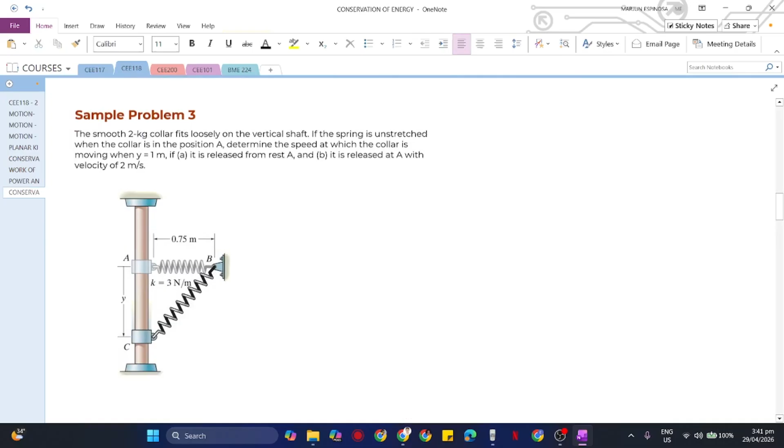Proceed lang tayo sa problem number 3. Tsaka later, we'll also be solving problem number 4 and problem number 5.

Okay, problem number 3. We have here the smooth 2 kilogram collar fits loosely on a vertical shaft. If the spring is unstretched when the collar is in the position of A, determine the speed at which the collar is moving when y is equivalent to 1 meter, if it is released from rest at A, and B if it is released at A with velocity of 2 meters per second.

Dalawang scenario to, class. Una, if i-drop lang yung collar A, so initially from rest, at yung isa may initial velocity siya na 2 meters per second. So kukunin natin yung velocity niya at point C. So basically that is VC.

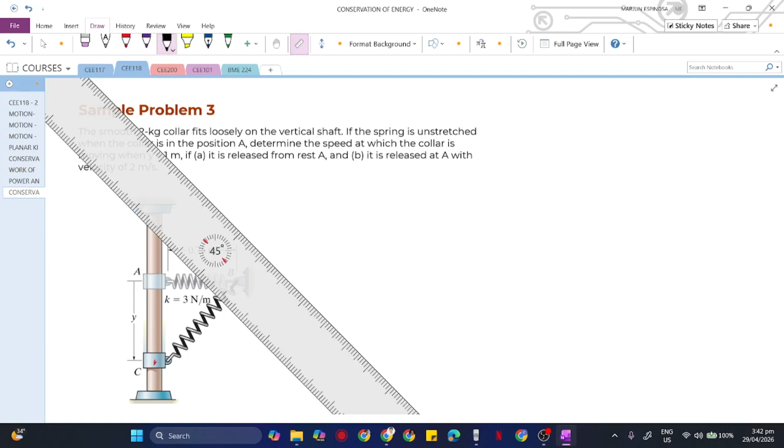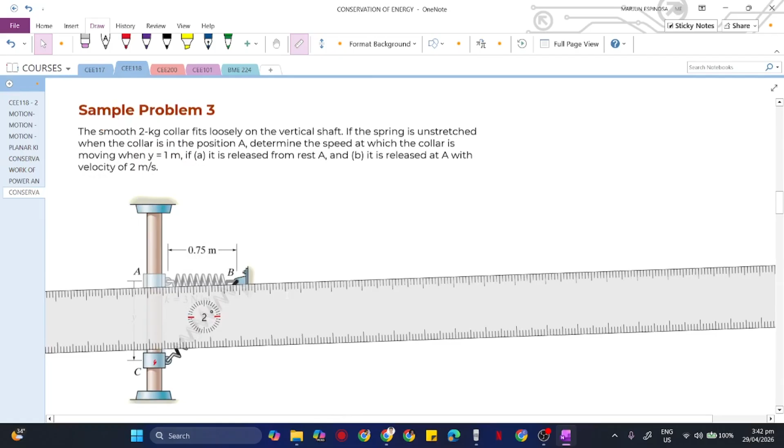Same thing kahapon, we will be assuming a datum line. Gagawa tayo ng reference line, or datum line. Gawa tayo ng datum line here. That is our datum line, so this is our datum line or reference point or reference line. Now at this point or at this line, yung velocity niya, initial kinetic energy at saka potential energy will be equal to 0.

Now, the moment na yung collar natin ay mag-move from point A papuntang point C, that is downwards, therefore magdi-decrease yung potential energy niya. Tama ba? Okay, so using law of conservation of energy.

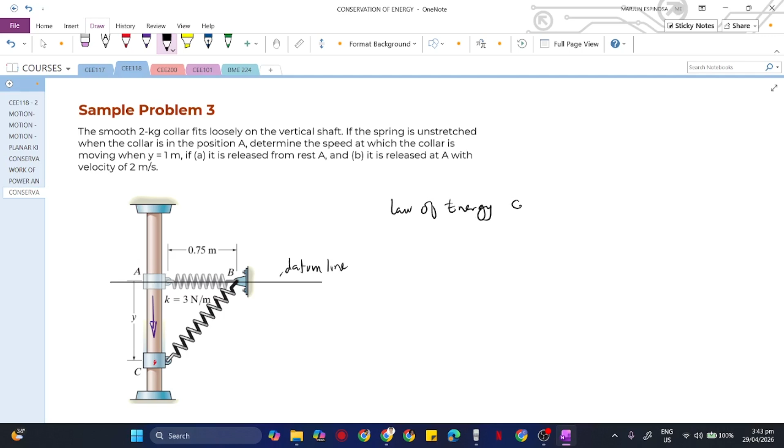Law of energy conservation, we have here kinetic energy 1 plus potential energy at state 1 will be equivalent sa kinetic energy at point 2 plus yung potential energy at point 2. Now, yung kinetic energy at point 1, considering yung first natin na scenario dito that it is being released from rest.

So yung kinetic energy at point 1 will be equal to 0. Yung potential energy at point 1 will also be equal to 0. At yung pinahanap natin dito is yung velocity at point 2, that is the velocity ng collar at point C. So VC, lagay natin yan V sub C square.

Plus, again, yung potential energy dito will be the summation of all the potential energy involved. Since yung weight natin ay nagbaba, so that is a negative potential energy. Due to that decrease in potential energy, nag-increase naman yung potential spring energy o spring potential energy nitong spring. So therefore, we have here 1/2 K S square, considering yung S natin is the stretched length ng spring, tapos minus natin yan sa weight potential energy, which is mgh. Ito na yung magiging equation natin for the solving of velocity at point C.

So but first we need to solve for the value ng S. Itong S, ano yung na-stretch or na-compress na length. Or in other words, ito yung length na na-displace, na-displace na length ng spring, either na-stretch or na-compress. But in our problem, obviously, na-stretch siya.

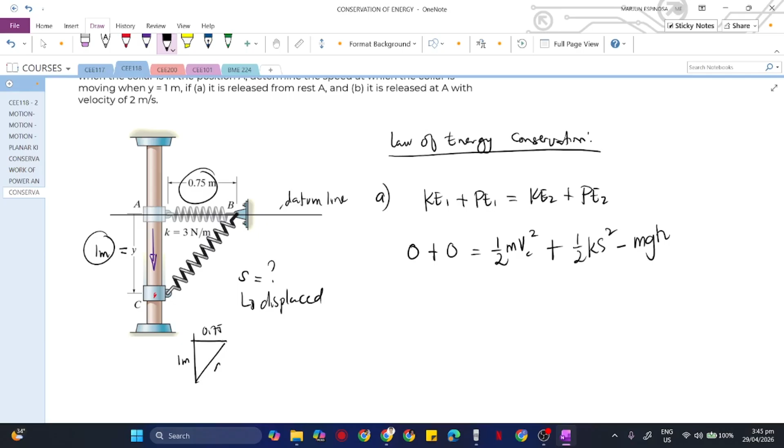Considering na yung y natin is 1 meter, so ito 0.75, ito 1 meter. So we can create a triangle, similar kahapon. So this is 1 meter, this is 0.75. Now we can solve for the value of C, itong hypotenuse na to o length nito, class. So therefore, we have here, C is equivalent sa 1 squared plus 0.75 squared. Obviously, this is equivalent sa... ano to, class? 1.25, diba? 1.25. Yes, correct.

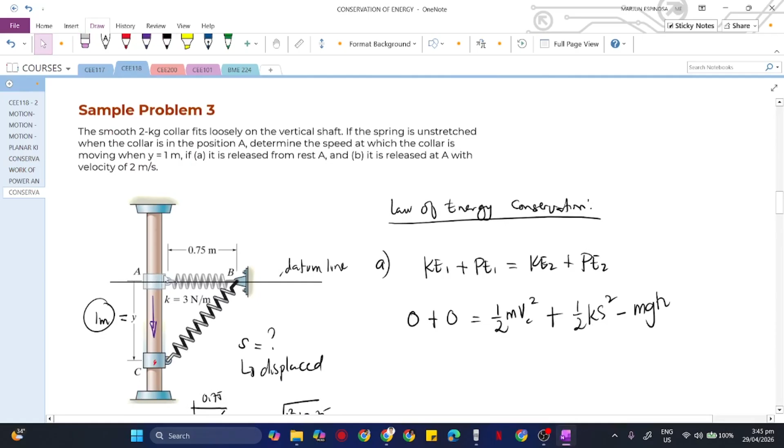At so therefore, yung na-stretch or na-displace na length pala is 1.25, yung final length ng spring. At then, initially, 0.75 yan. Tama ba? Sabi dito kasi, if the spring is unstretched when the collar is in the position of A, so ito yung unstretched na length ng spring. So that is 0.75. So minus 0.75, therefore yung stretch length pala is 0.5 meters. So yan yung gagamitin natin na S for this one here.

Okay, so therefore, ang mangyari nito, 0 equivalent sa 1/2. Yung mass ng collar is 2 kilograms.

Tapos velocity square plus k, 1 half, yung k natin is 3 newtons per meter, tapos yung s natin is yung na-calculate natin, 0.5 square, then minus yung collar natin, tapos 9.81, tapos yung height, yung binaba is 1 meter. Okay, 1 meter. So shift solve, makukuha natin itong velocity at point C, o velocity ng collar at point C. Sige, kunin natin yung calculator.

0 equivalent sa ito, magiging v square na yan, no? So gawin natin is ito, i-algebra natin, punta natin dito lahat yan, transpose natin. Okay, magiging negative na yan, negative 0.5, negative 0.5 or 1 half times 3 times 0.5 square. Then ito magiging positive, positive 2 times 9.81 upon transposing to other side. Okay, that is equivalent to this one, 19.245.

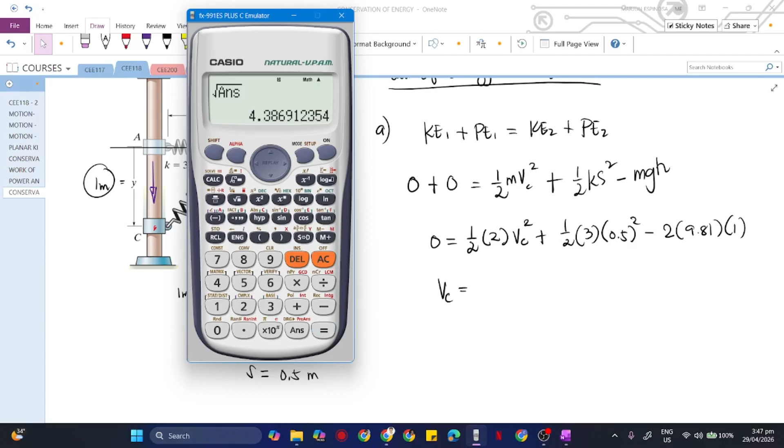That is our VC squared. Then taking the roots of that, okay, taking the square root, we get 4.386, or about 4.39 meters per second. Okay, meters per second.

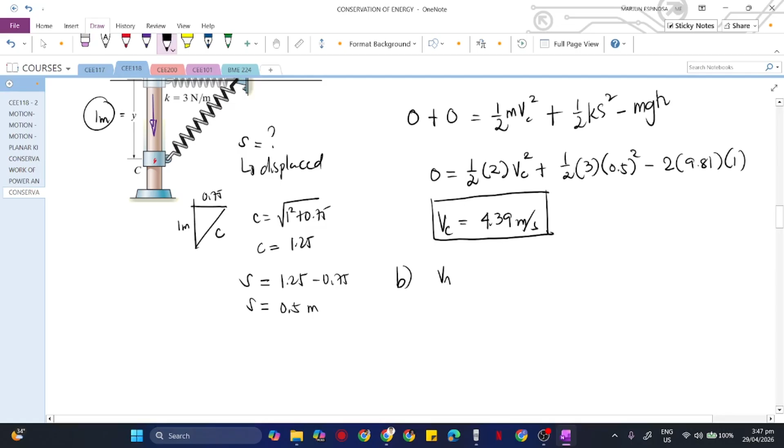Okay, then yung sagot dito, considering na yung collar natin is released from rest. Now, if ever yung collar natin at point A ay mayroong velocity that is equivalent sa 2 meters per second, ang mangyayari lang dito is similar pa rin yung magiging equation natin.

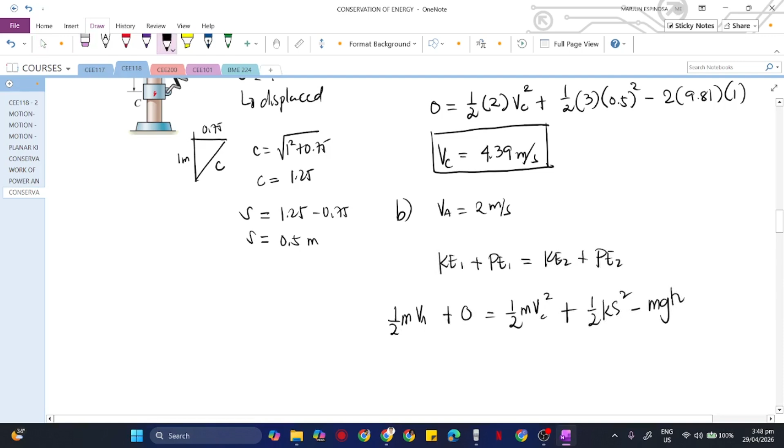Ito, let me just copy this one. Similar pa rin yung magiging equation natin. Pero yung sa kinetic energy, meron na yung 1 half m velocity sa point A square. So basically similar pa rin dito, similar pa rin yan dito. Pero instead of 0 na dito, magiging 1 half, tapos mass, 2 kilograms, tapos velocity, which is ang velocity natin is 2 square.

Okay, so balik lang tayo dun sa ating previous na nasa input natin sa calculator. Ito, lagay natin dito, diba? 1 half of 2, that is 1 lang, tapos 2 square. Lagay natin dito 2 square. And then similar lang yan, then square root nyan, and then we get 4.82.

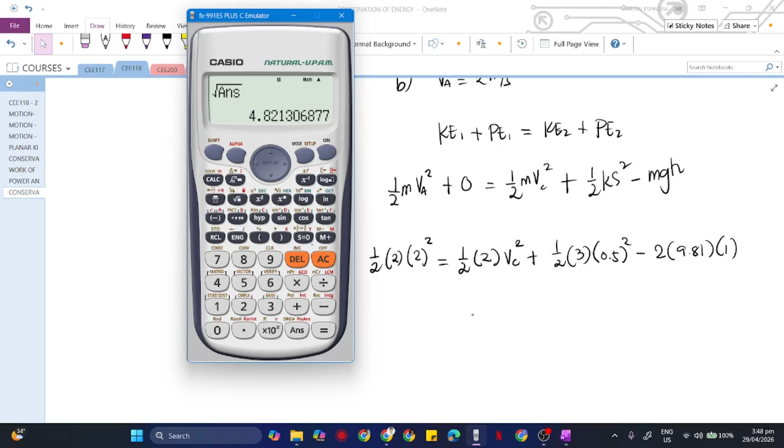Yan na yung magiging sagot natin for dito. So yung velocity at point C ng collar is 4.82 meters per second, and direction yan is papunta dun, papunta dito, papunta sa ilalim. As you can see, mapababa man yan. Ito din, no? So any questions, class?

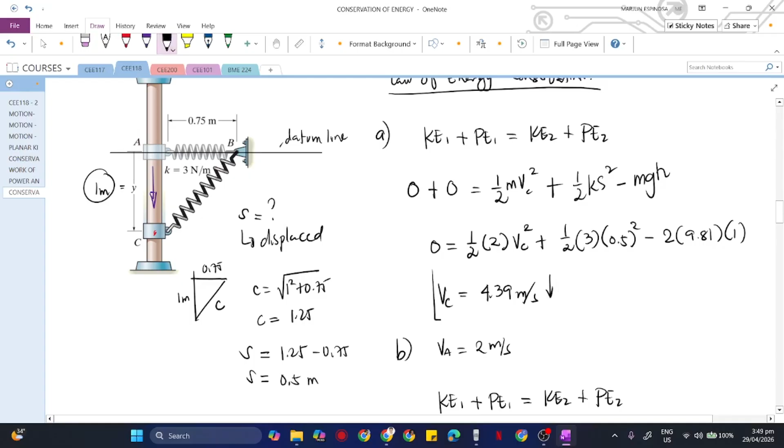Hello, any questions regarding this problem?

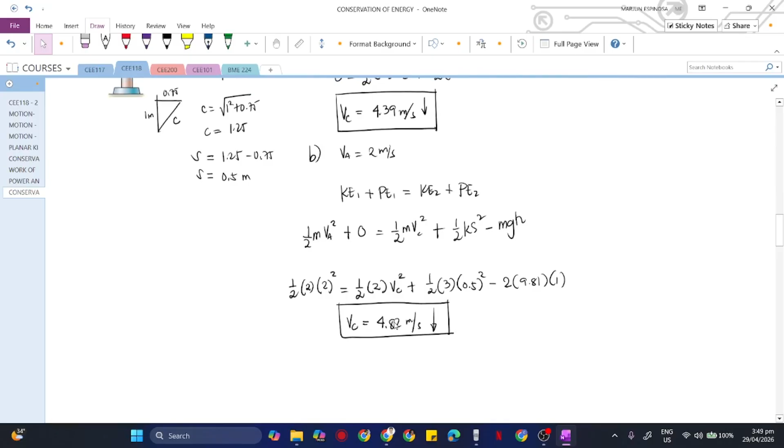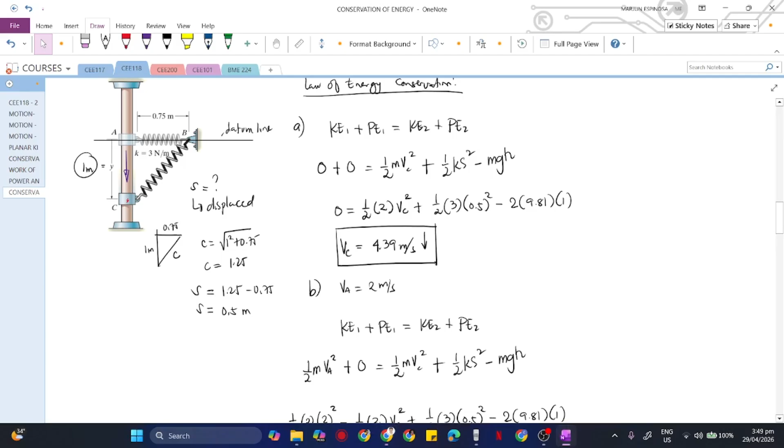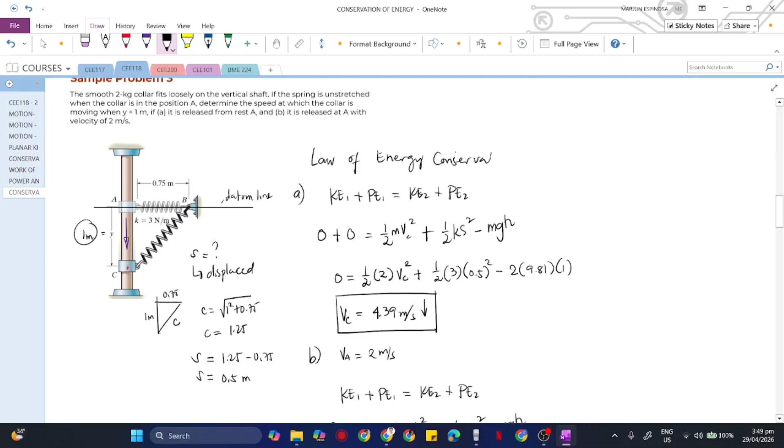P sir, no? Hello? Sorry? Nawala ka, kindly repeat your question please. Hello? Nawala, no? Or ako ang nawala? Hello? Hello sir, oh pakiulit na lang yung tanong. Putol-putol ka sir, putol-putol ako. Sorry.

As I was saying, yung PE1 naging 0 yan kasi we assume dito na itong line na to is yung tawag nito, yung datum line natin. Saan tayo magre-reference line? Dun sa initial position. Nakuha ba?

Hello? Hello? Yes sir, yes sir. Wala nagliyok imong PPT, sir. Okay, sorry, as I was saying, no, di ba dito, dito tayo naglagay ng datum line or yung reference line, tama ba?

So ang ano kasi, rule kasi, hindi necessarily the rule, pero yung naging convention is that we will be putting a reference line kung saan yung initial position ng ating collar or ng ating object. So kaya at this point, sa reference line, we assume na yan yung magiging ground natin, kumbaga, imaginary or arbitrary ground. So at that point, yung potential energy dan is 0. Kuha ba? Kaya nagiging 0 dito.

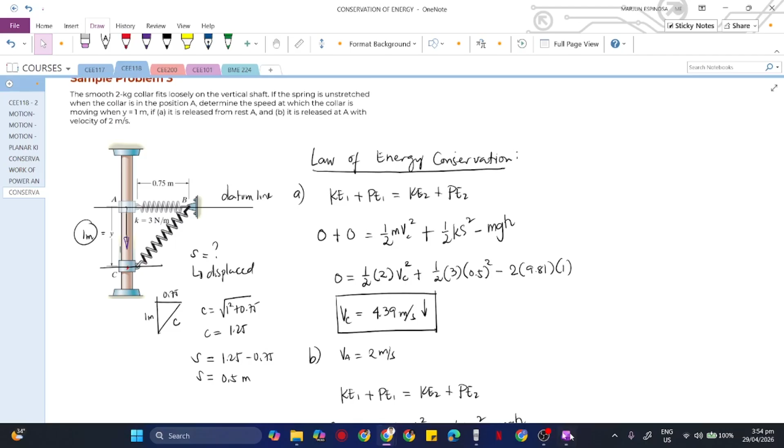Okay, that's good, no? Sige, can we proceed to problem number 4 pala? Okay, proceed tayo sa problem number 4, ha? May question pa?

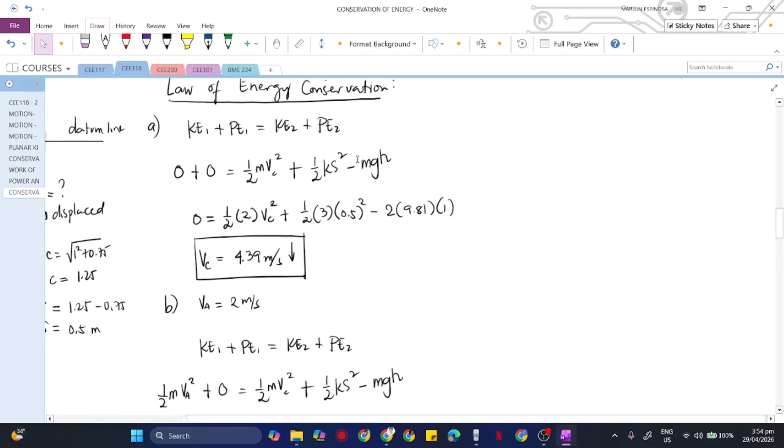Sa second na part ng equation po, sir. Bakit tatlo lagi yan siya, sir? Di ba dalawa lang yung KE2 and PE2?

KE at saka itong potential energy, di ba kahapon yung potential energy meron yang tatlong types, yung weight, potential energy due to weight, meron din tayong spring potential energy, at saka yung isa? Yung sa spring o elastic potential energy, yun pala, so that is due to the spring. Okay, etong potential energy at point 2, that is the summation ng all potential energy involves, no?

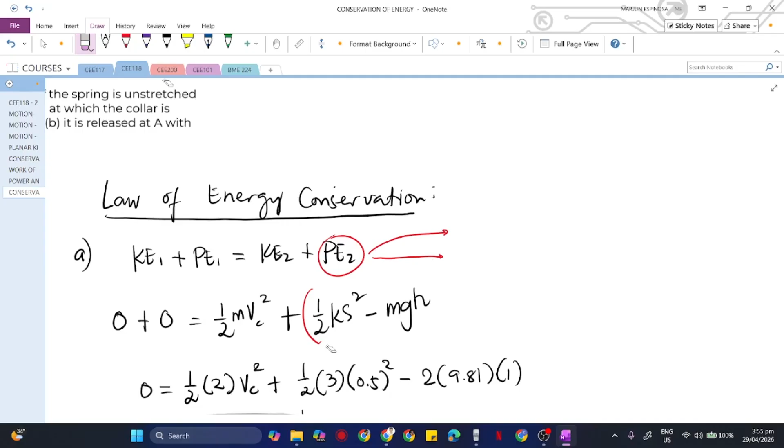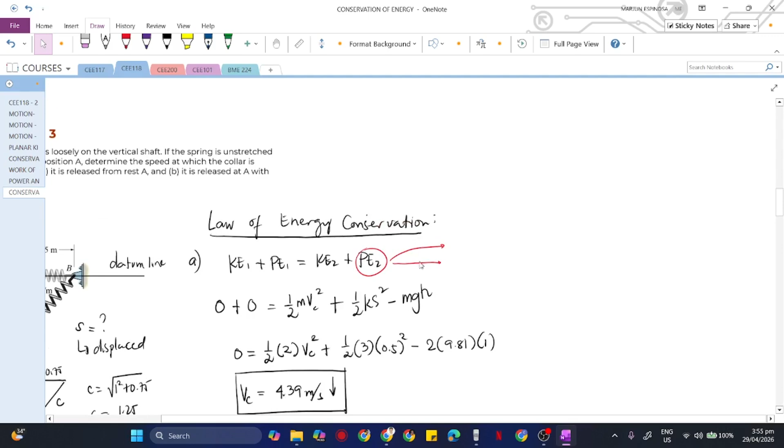Di ba sabi doon sa conservation of energy law, you cannot create or destroy energy, it will be just transferred or transformed to another form of energy. Yung total summation ng potential energy at point 2, since yung object natin initially dito nagbaba, so nag-decrease yung potential energy niya due to weight, tama ba? So saan yun, kung nag-decrease yun, then saan yun pupunta? That will be absorbed by the elastic potential energy o yung potential energy ng spring.

Kaya yung potential energy dito is basically ito yun. Nakuha ba, class? Yes sir, thank you po. Thank you for that question, no? That's a good question, okay.

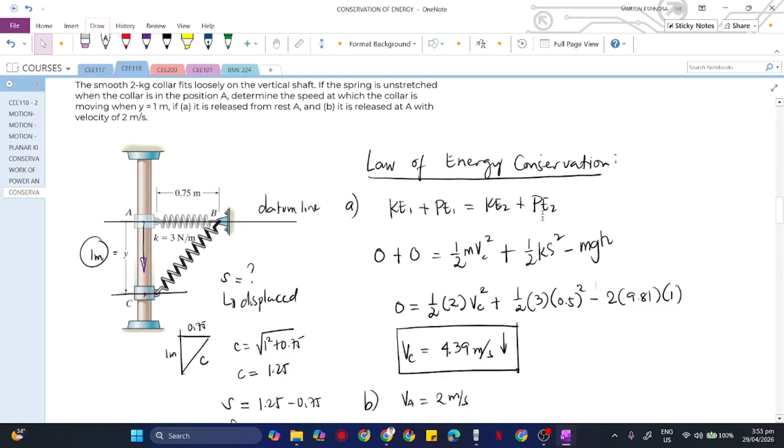Sige, can we proceed to problem number 4 na? For problem number 4, we have here a gantry structure, as shown, is used to test the response of an airplane during a crash.

As shown in the figure, the plane having a mass of 8 megagram is hoisted back until, parang galing dito, naka-tied up yung plane natin, then binalik siya papunta dito sa point A, wherein initially naka-hoist yan siya using this rope na naka-tie up sa point C. At what angle? 60 degrees, okay, until 60 degrees daw yung angle dito.

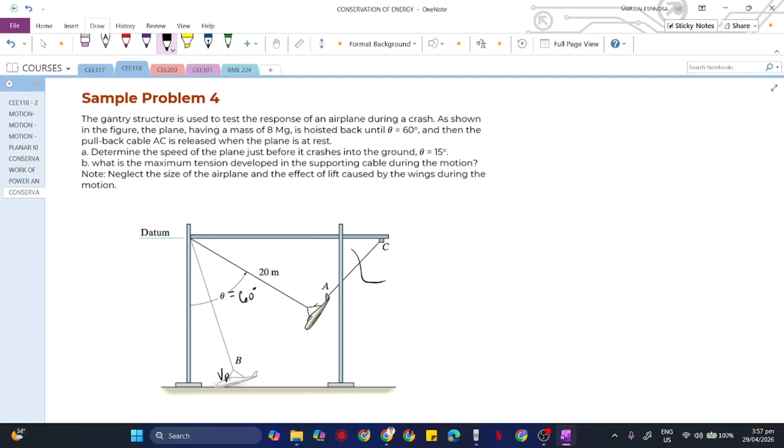Sabi dito, then the pullback cable AC, itong naka-tie up yung airplane natin, is released from rest when the plane is at rest. Kinata natin to, na-release yung plane, tama ba? Now determine the speed of the plane just before it crashes into the ground. Ano yung velocity niya at point B before it crashes to the ground, wherein yung angle daw dito, itong angle dito is equivalent sa 15 degrees. Now also, what is the maximum tension daw na develop in the supporting cable during the motion?

So dito, initially at rest yan. So during the motion is actually nitong papunta na siya or nasa siya dito sa state B. So ano yung magiging tension nito or maximum tension in here? So neglecting the size of the airplane and the effect of lift caused by the wings during the motion. So nineglect natin yung size ng airplane at saka yung lift, no? Wala man ako nawala, no?

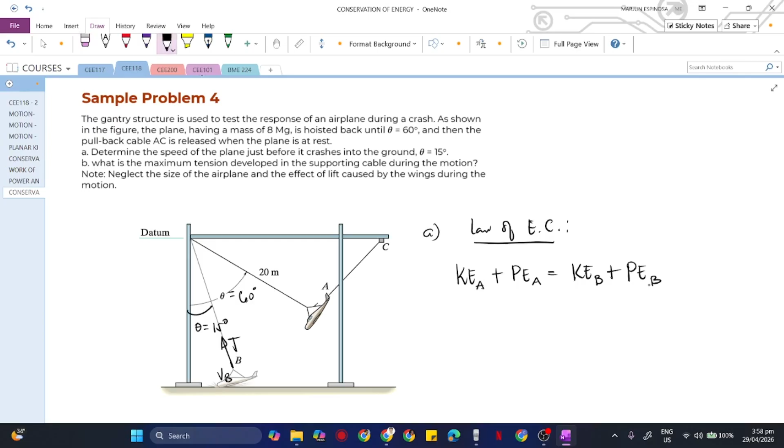Okay, so to solve for this one, basically we need to solve for scenario A, no? Kukunin natin yung velocity ng plane natin before it hits the ground. So we have here, according to the law of energy conservation, easy na lang, no? So that is yung kinetic energy plus potential energy at state 1, wherein yung state 1 natin is state A. Plus potential energy nung sa state A is equivalent sa kinetic energy nung sa point B plus potential energy nung sa point B also. Now, so this is our ground, no?

So dito pwede tayo dito mag-reference, no? Then, o pwede din tayo mag-reference dito, okay, anyway similar pa rin yan, no? Sorry, dito na tayo mag-reference sa ground, okay, considering this is our datum line, okay. This is our datum line or reference line.

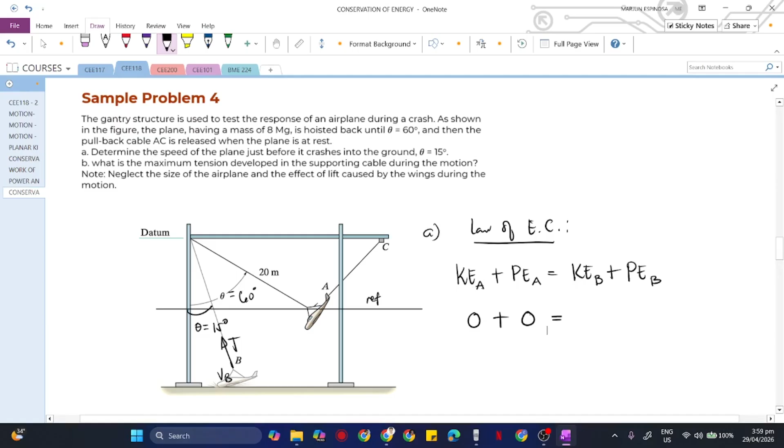So yung kinetic energy natin, initially at rest man yung plane natin, so that is automatic 0. Plus, okay, yung tawag nito... para ano na lang siguro, no, para tawag nito... para uniform kanina, so we'll make our datum line dito na lang na point. Okay, sabihin natin dito na lang. Sabihin natin dito na yun, dito yung reference point natin. So at that point, yung kinetic energy at saka yung potential energy will be equal to 0, tama ba? Similar kanina, no? Then ang hinahanap natin is yung kinetic energy at point B. So this is equivalent sa 1/2...

Wala man tayong spring, no? Di natin ma-equate, tension kasi unstretchable yan. Okay.

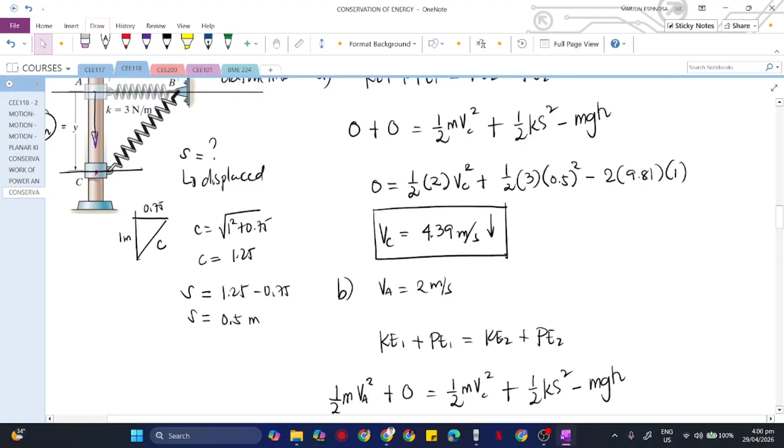For this one, hold on. Ang gagawin natin is pwede tayo dito na lang siguro mag-reference sa ground mismo. Kasi yung kanina, ito dito. Pwede tayo mag-reference dito kasi sa initial position, we have here yung potential energy ng weight nun due to the decrease in elevation will be absorbed by the spring.

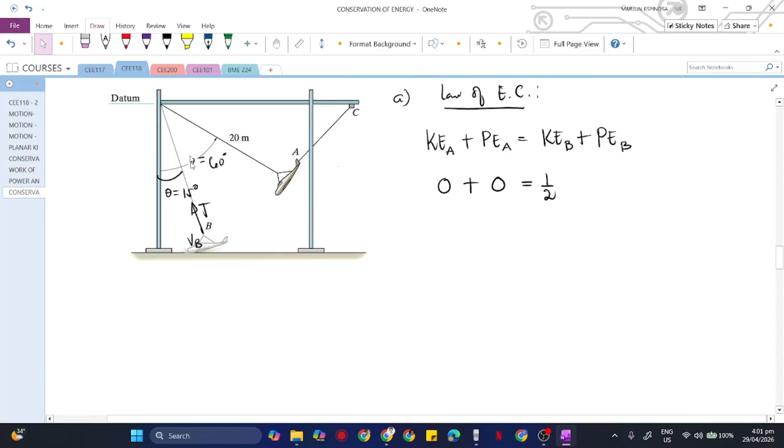Pero dito na case, yung cable is unstretchable yan. Tension dito sa cable is unstretchable considering, no? So, therefore, dito tayo mag-reference point or line. Sa ground mismo tayo maglagay ng datum line.

So, kukunin natin yung vertical component nito. Okay, ito yung magiging tawag nito, position natin, HA. And then, at this point right here, ito naman yung magiging, okay, gawa lang ako ha.

Ito yung magiging HB natin. Hindi talaga yan na, kasi ang tanong dito is before it crashes the ground, before it touches the ground. So, na-exagerate lang yung diagram dito, no? Pero, basically, meron tayong height at point B.

Okay? So, ang mangyari dito, yung kinetic energy, magiging 0 pa rin yan. And then, yung potential energy ng ating plane dito sa A, that is plus yung mgh sub A. Then, yung pinapahanap dito, 1 half mvb square plus yung potential energy naman dito.

Tama ba? Which is equivalent sa 1 half, mass, tapos gravity, tapos hb. So, obviously, yung mass is equal lang all throughout. Tama ba? So, pwede yan i-cancel na lang, no? And then, we have gravity, equivalent to 9.81.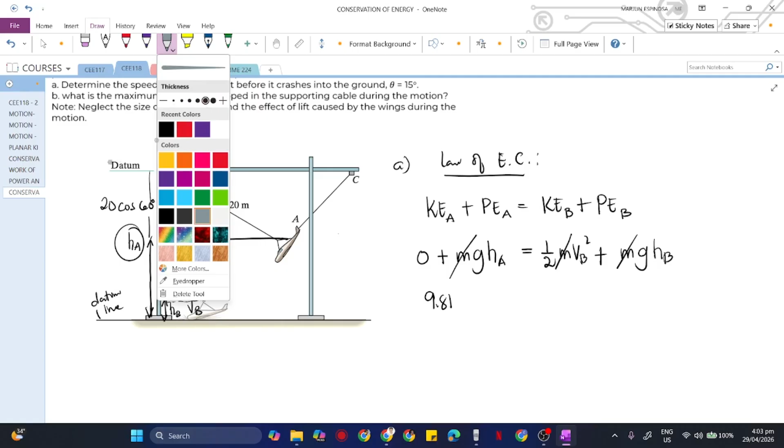Anyway, meron pala tong datum line dito, class. Hindi ko nakita. Anyway, pwede lang din tayo mag-erase dito ng ganyan, no? Anyway, try ko ha. Kailangan natin ng height nito.

So, we are not given with the height. So, tama na dito tayo mag-datum line. Okay, sorry class. Meron pala dito tong datum line. Anyway, hindi ko nakita ba? Sorry. Okay, if that is our datum line, no?

Okay, if this is our datum line, mangyari nito, magiging negative lang to. Kasi that is below the reference point, no? So, similar pa rin yan yung magiging numerical value, pero negative lang ito dito. Negative lang to dito as well as this one. Negative lang din, kasi wala tayong height na given total height.

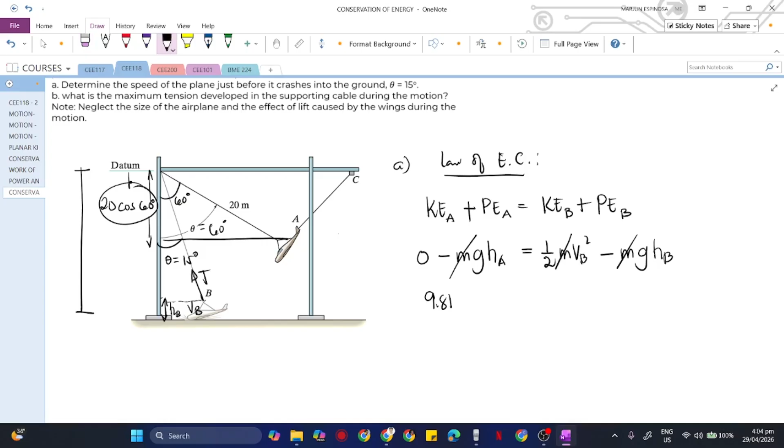Kasi need natin yan i-subtract tong 20 cosine 60 by the total height para makuha natin yung HA. Okay? So, gawin natin is that ito yung magiging reference point natin. So, therefore, this is our HA. Ito na part here. And then, yung HB natin, ito na naman. Ito naman. Okay? HB natin. Yan. Okay, at this point.

Okay? So obviously, gravity, 9.81. Then, yung height natin, no? Galing sa datum line, papunta sa position at point A. So, that is 20 cosine of 60 degrees. Okay? And that is equivalent sa 1 half, no? And then velocity at point B, yan yung hinahanap natin.

And then minus 9.81. Ano naman yung height ng position at point B galing sa datum line? So we have now 20 cosine 60, di ba? Or pwede din, since yung cable na to hindi naman yan nagsi-stretch, so that is also 20 pa rin, tama ba? Itong cable na to ba? 20 pa rin yan, no? Then, cosine, ito, 15 degrees, no?

So, that is still 20 cosine of 15 degrees. So, therefore, we have here 20 cosine of 15 degrees. Okay? Sige daw, paki-shift solve naman. Sir, wala ni mo nabutang og negative sa pita, sir. Okay, negative, sorry.

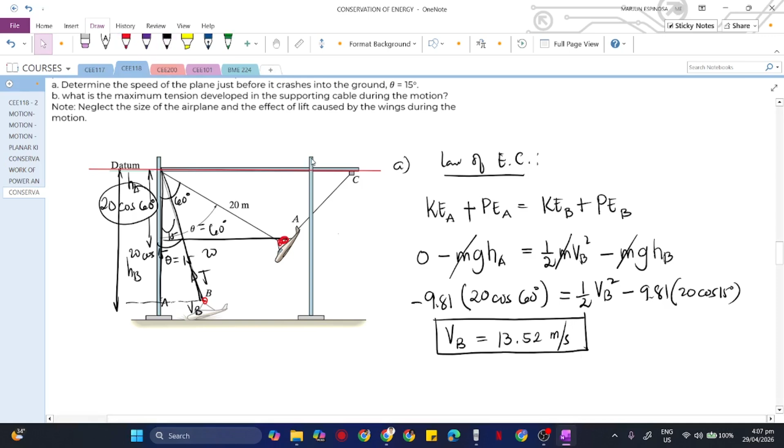Questions on letter A? Okay. Then for letter B, the question is about the maximum tension developed during the motion. So that is at point B.

Let's make a free body diagram. So we have tension here, and then we have the object, our plane. So our weight, it's here, our weight.

So what is our weight? 8 Mg or megagrams, so that is 8,000 kilograms. Then multiply by 9.81 to convert to newtons.

Since that is 15 degrees here, therefore this here is also 15 degrees, because opposite angles are equal. Or we can also say this is 15 degrees, and this is also 15 degrees. Anyway, it's still similar.

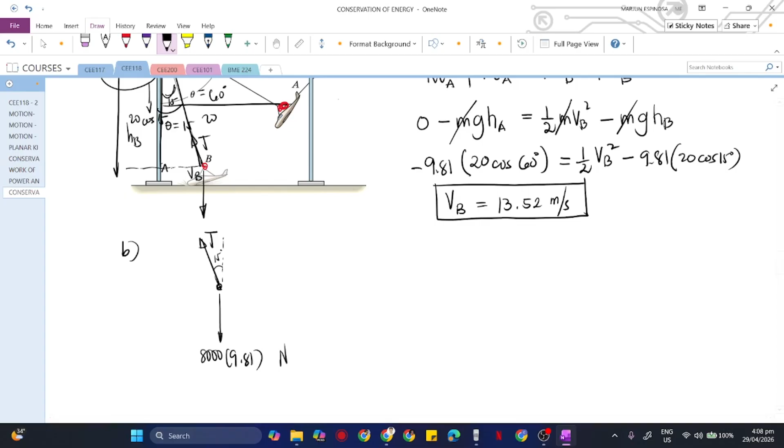So now we will just sum up the forces. We don't have a normal force there because the plane doesn't touch the ground before it crashes into the ground. So those are the only forces we have.

So for tension, basically the summation of forces along y, equate that to 0. Positive is our assumption for the arrow pointing upward. So we have T times cosine of 15 degrees minus 8,000 times 9.81 Newton, equivalent to 0. Please evaluate the value of our tension, class.

Will this be in kilonewton, sir? This will be in Newton, because kilograms times meter per second squared is Newton. So Newton is our expected answer here.

What's the answer to this? 148922, sir. 148922, okay, that is in newtons. If we assume kilonewton, just move 3 decimal places, so that is 148.9, approximately 148.9 kilonewton, or as a whole number, 149 kilonewton.

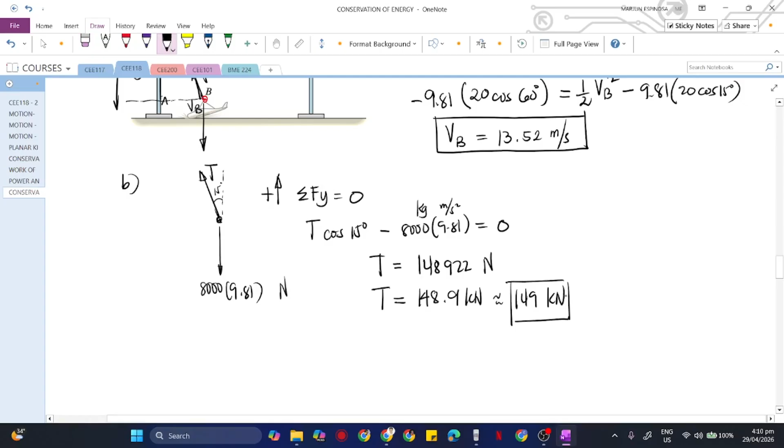Okay, similar lang yan. So our tension is equivalent to 149 kilonewton. So that's during the motion.

When it asks what is the maximum tension developed in the supporting cable at the position when our plane is at rest, that's two tensions. We have tension here in the cable and also tension here in the pullback cable AC. So that's two unknowns, and then we have the weight. That would be a problem because we cannot have another equation that would represent these two tensions, since from here alone we'll already get two unknowns.

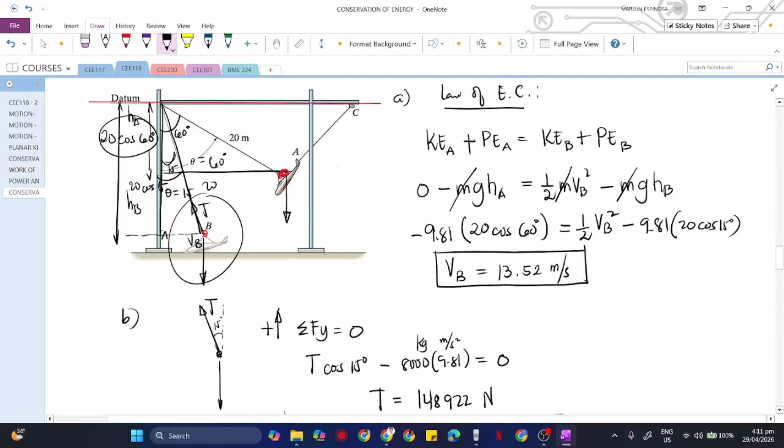So most likely the question refers to during the motion. We could solve the tension in the cable at point A if given the tension here, but for our problem nothing was given, so therefore the question refers to during the motion. Okay? Got it, class? Questions?

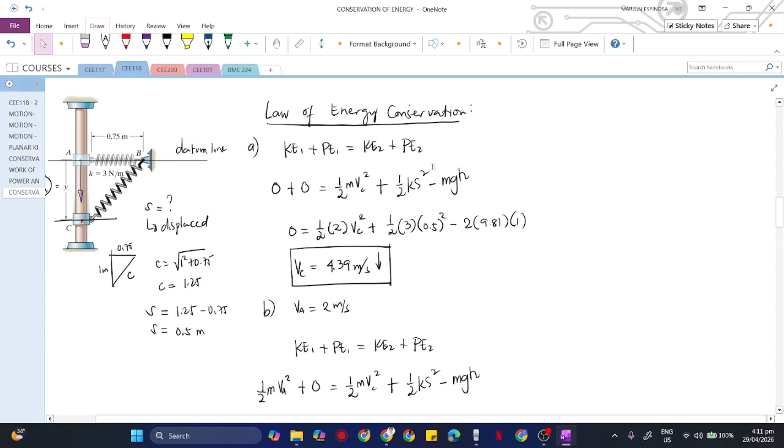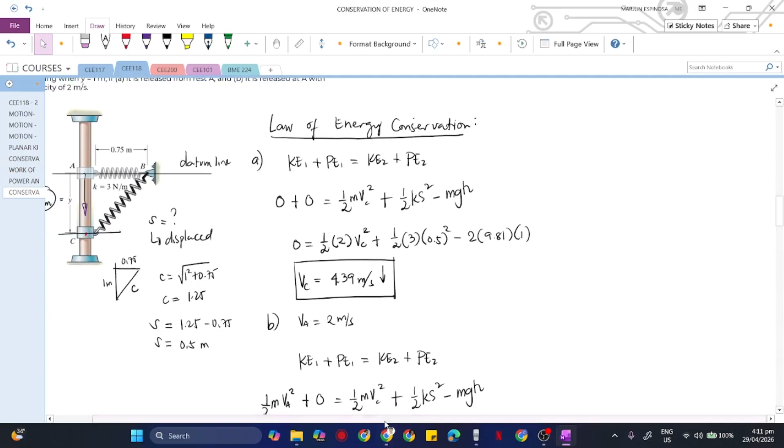Our datum line in this problem is at the initial position of the collar from A to B. That is along A to B. So okay, that's all there is to it.

Our weight, the collar, it goes down, right? Going from A towards C. So if this is our datum line, reference line, our weight will induce a negative potential energy because its elevation decreases.

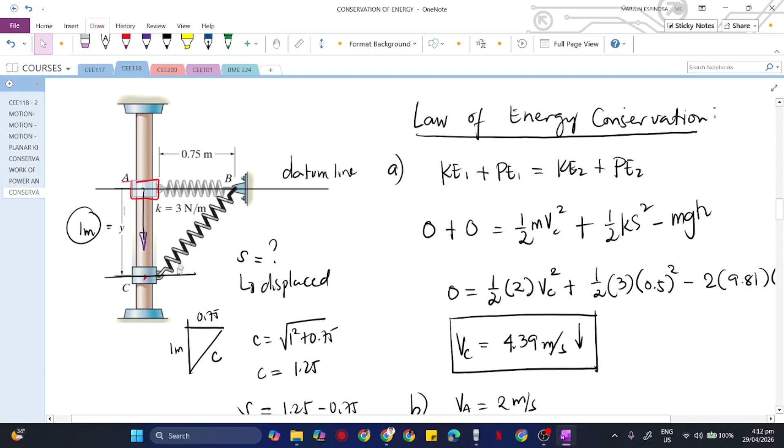Okay, the potential energy decreases. Then based on the law of conservation of energy, energy will not be destroyed and you cannot create energy. It will just be transformed or transferred into another form of energy. So if the potential energy decreased here due to weight, due to the decrease in elevation, who will absorb that lost energy? The spring will.

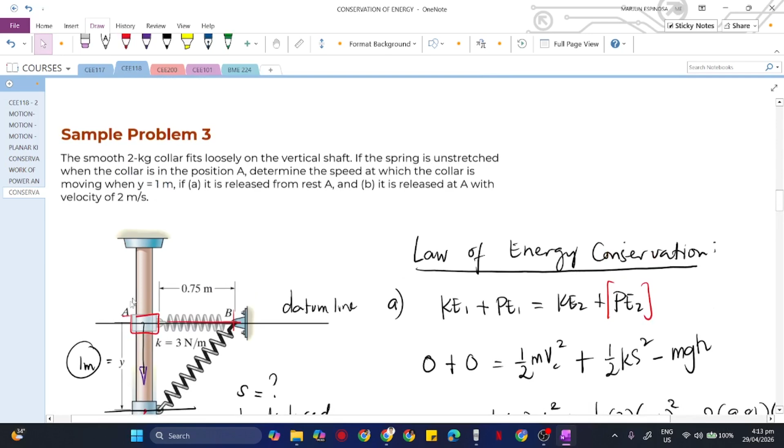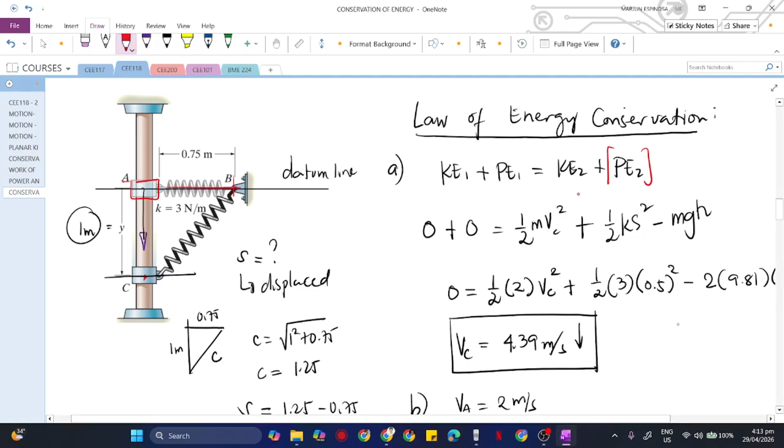Okay? Got it? Okay sir, thank you sir. Okay, no worries, no worries.

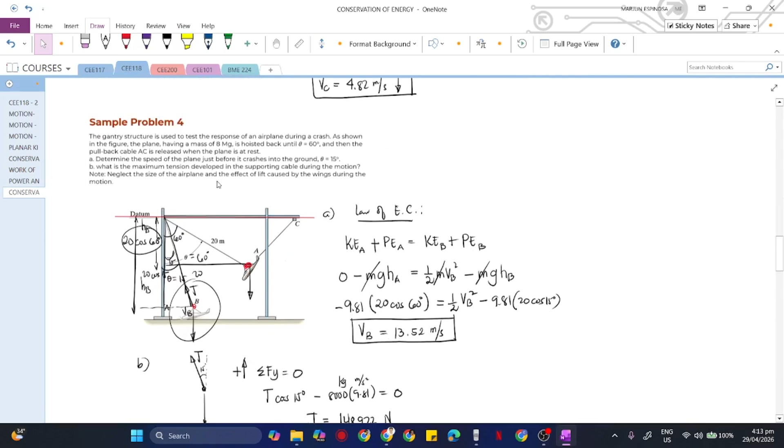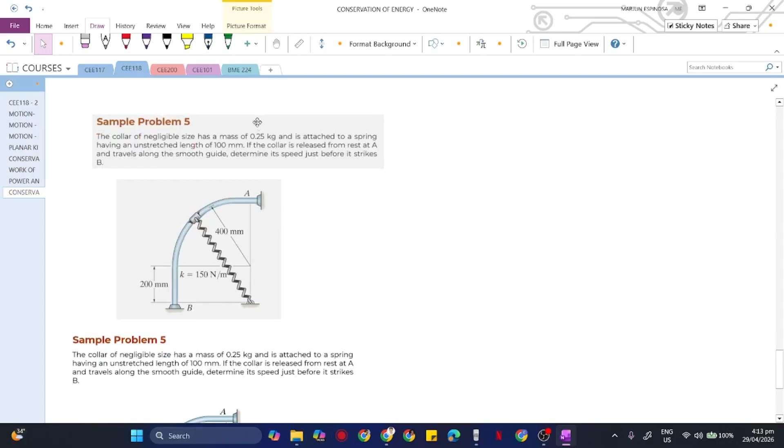Okay? Are we good with problem number 4? I think meron pa tayong problem dito. Let me just move it upward. Since we still have 17 minutes, we can still solve for this problem. Okay, for problem number 5, I think this is our last problem for the day, no?

Tomorrow, by the way, we'll be having a comprehensive sheet work or quiz, kumbaga, for the topics ng 7th exam. That would be yung impulse, galing sa impulse, papuntang work and energy, hanggang dito sa ating conservation of energy. Okay, you just need to review lang ha ng mga topics natin na na-discuss.

Okay, for sample problem number 5, the collar of negligible size, ito yung collar, no, has a mass of 0.25 kg. It is attached to a spring having an unstretched length of 100 mm. So, obviously, hindi yan 100 mm, no? Kasi, that is already stretched na position. So, malamang, if this is 200 mm, mas maliit pa yun. Ito na yung unstretched length, kumbaga, ng spring. Okay, that is 0.1 meter, or that is 100 mm.

So, gawin natin yung meter, no? Okay, ito din gawin natin meter. So, 0.2 to, ito 0.1, ito 0.4. Kasi naka-newton per meter to dito ang ating spring rate. Okay? So, basically, no, ganyan yun.

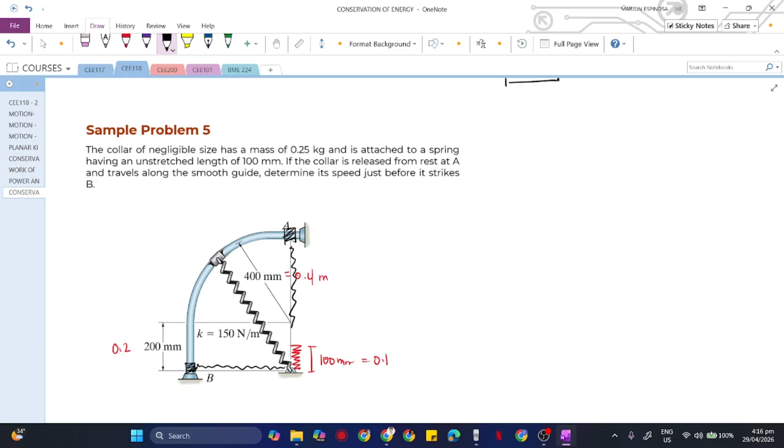So, if the collar is released from rest at point A, so initially, resting siya dito sa point A, then na-release siya and travel along the smooth guide dito. So, mean to say, smooth guide, walang friction yan, o nineglect natin yung friction, determine its speed just before it strike point B. So, ano dito yung velocity. Okay? Let me just write, no? Ganyan yan. So, ano yung velocity dito just before it hits point B.

So, same pa rin, law of conservation of energy or law of energy conservation. Okay? So, we have here kinetic energy at state 1 or at point A plus yung potential na energy natin sa point A. Equivalent yan sa kinetic energy at point B plus yung potential energy natin sa point B.

Now, saan nyo gusto maglagay ng datum line or reference line? Huwag nyo naman sabihin no, na dito sir, vertical. Hindi, yan pwede, no? Kasi, paano tayo mag-evaluate ng potential energy dyan? So, dito lang tayo sa ground. Pwede naman. Okay? Hold on. Yan. Ground. So, for example, dito tayo sa ground, o dito na lang sa point B na lang na part.

Sa point B na lang tayo na part. Kasi we don't know kung ano to height, tsaka hindi naman sila similar yung elevation niya dito. So wala din tayong height dito. So dito tayo gagawa ng datum line dito sa point B. Okay? So this is our reference line or datum line.

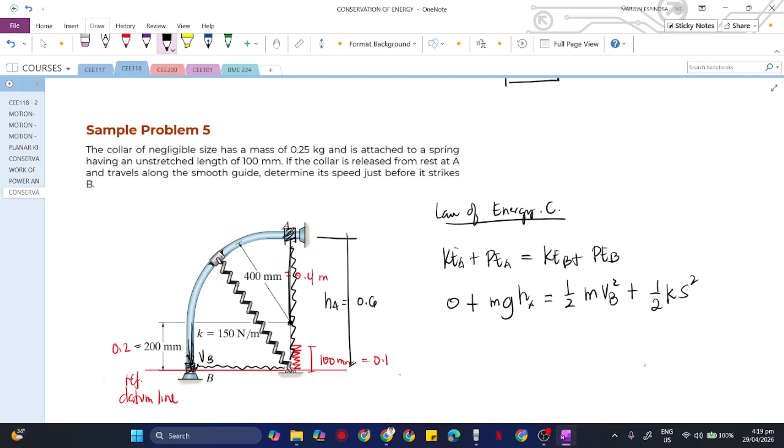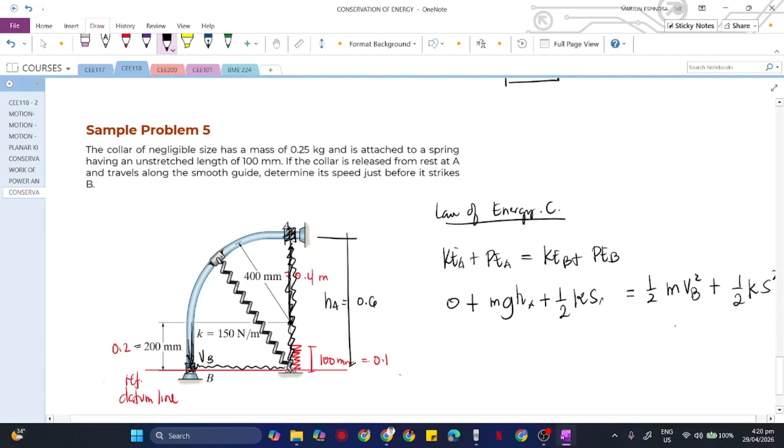Sandali lang ha. Wait, meron dito sa point A pala. Okay, since na-stretch din yung spring dito, no? Meron din tayong dito spring potential energy. Okay, diyan sa point state A ha. Meron tayo ditong, since na-stretch yung spring dito kasi yung unstretched na length ng spring is only 0.1 meter. Then dito sa point A, na-stretch yung spring. So meaning to say, aside from the weight na potential energy, at point A, meron din tayong spring potential energy. So that is also positive, no? Kasi increase yan, 1/2. Na-stretch kasi, so positive, no? 1/2, then K, then yung na-stretch na length ng spring dito sa point A, then square. Okay? Equate natin yan dito sa, okay, hold on na.

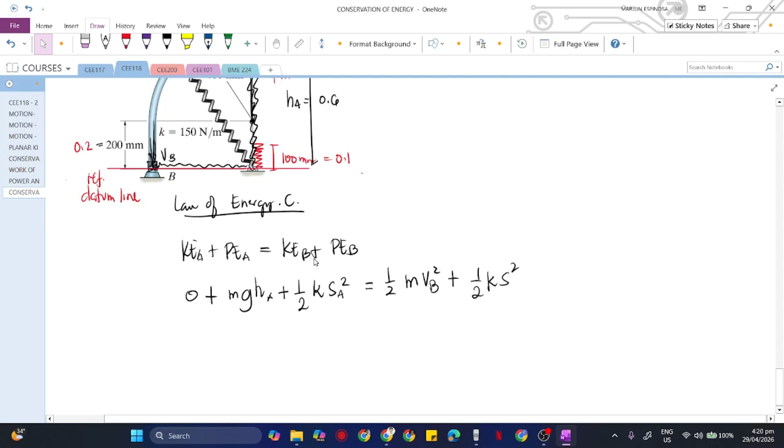So we equate that to the kinetic energy at point B plus the potential energy of the spring at point B. Then we have 1/2 K times SB squared. The potential energy here will be equal to 0, correct? There's no more potential energy there, because due to the weight, MG, the HB is 0.

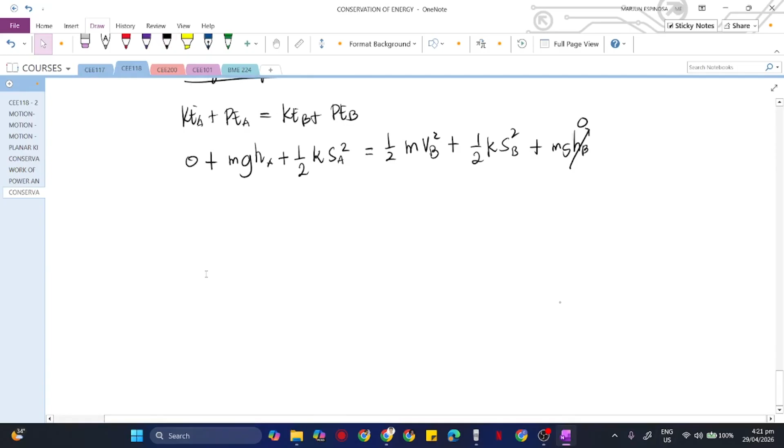So recall that SA is the total length that is stretched, right? Total length stretched means the final length of our spring at state A is 0.6.

Then, what is the unstretched length? Isn't it 0.1? So that is 0.1. So basically, our SA is 0.5. That is the total length of the spring that is stretched, with reference to the unstretched length. So that's 0.5, that's the stretched amount.

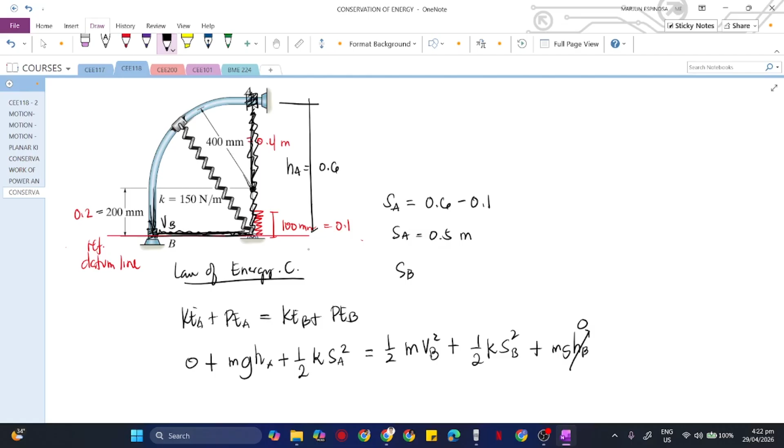Okay, we will be using that. So M is equivalent to 0.25, that is the mass of the collar. Then gravity, which is 9.81. And then HA is, as I've said, 0.6. So 0.6 plus 1/2. The K of our spring is 150 Newton per meter. Then our SA is 0.5 squared.

We equate that to 1/2 times the mass of the collar, 0.25, times the velocity at point B squared, which is what we're looking for, plus 1/2 times 150 times SB which is 0.3 squared, plus 0.

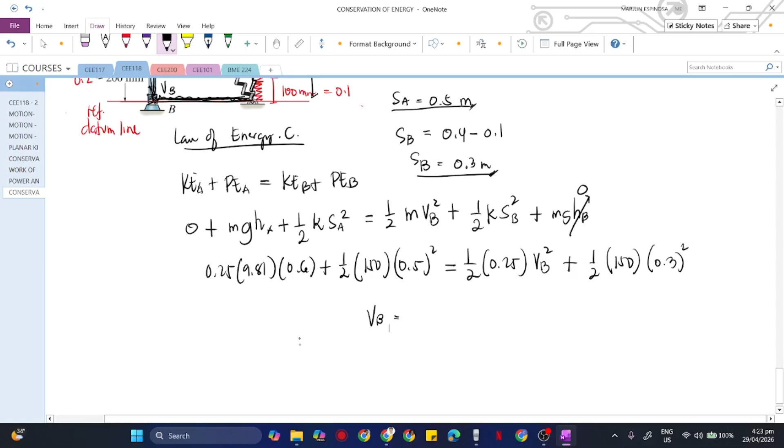So we have 0.25 times 9.81 times 0.6, plus 0.5 times 150 times 0.5 squared. Okay, equate that to 0.5 times 0.25 times x squared, plus 0.5 times 150 times 0.3 squared. Be careful because our VB is squared.

So there are two possible roots for that, right? If you shift solve, okay, shift solve. If you give an initial guess or initial value here, and you put 0, this is very critical, because the closest value of the two roots could be either positive or negative.

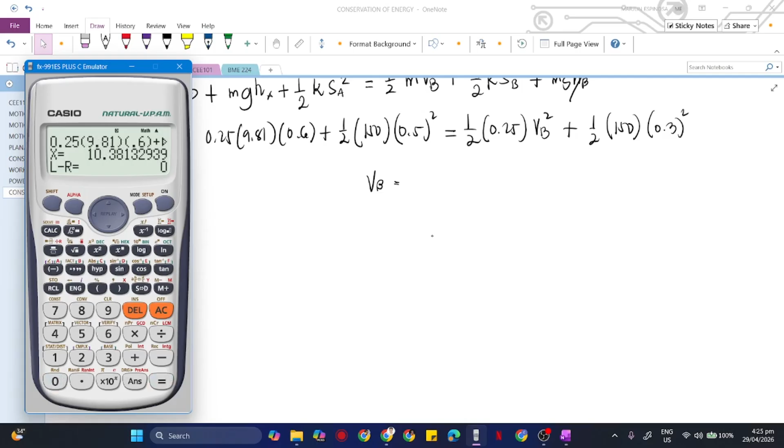I shift solve, looking for VB, then I check my choices, what are the choices. For example, 5, 10, 15, and 20. So what I do is I input an initial guess of 20. So likely, the closest to your positive value is what it will give. So in this case, the actual answer here is positive 10.4 meters per second.

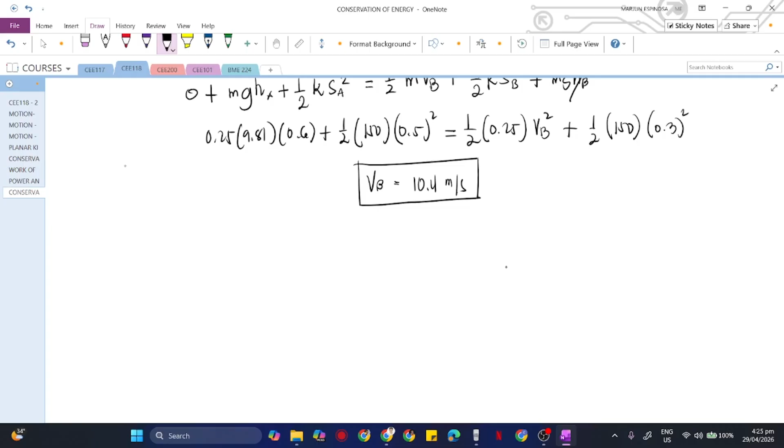So that's the technique I use, even in the board exam. So when I shift solve, especially if what we're looking for is squared, there are two possible roots for that, either positive or negative. So it's very important to put an initial guess that is a positive value, and then match it to the choices. Okay, I hope that's clear to everyone.